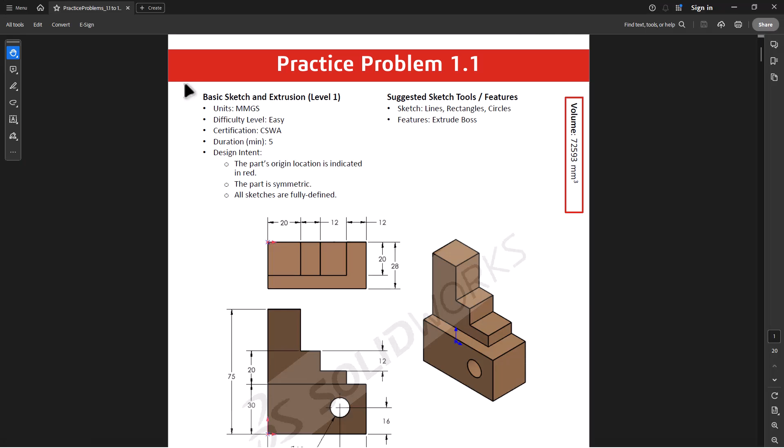Now let's begin with level 1. Here I have a PDF file. When you open it, you'll find the description regarding the problem. I want you to go through the sketch given in the part and try to match your volume against the given value on the right top corner. So let's start with problem 1.1.

Now click on new document. I will use this millimeter template. Here I have added a sensor which measures the volume. You can also measure the volume from the Evaluate tab and click on mass property after you create the model. So let's start the modeling process.

Now I will open the sketch on the front side. Here I will add the bottom rectangle of 30 by 60. Along with that, I will also add the circle whose diameter is 12, and I will fix its location as given in the sketch. Now I can also draw the upper part, and I will use this sketch in the second extrusion.

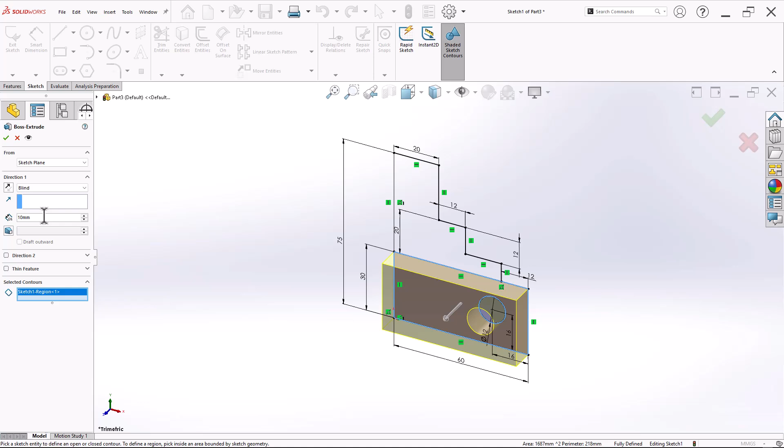Now press the shortcut key and click on extrude. I will choose this region and extrude by 28 mm. Now I will expand and select the sketch, and again extrude the upper part by 20 mm. Now let's rebuild this. You will see the volume over here - it is 72593. So here in the PDF, it is the same answer, 72593.

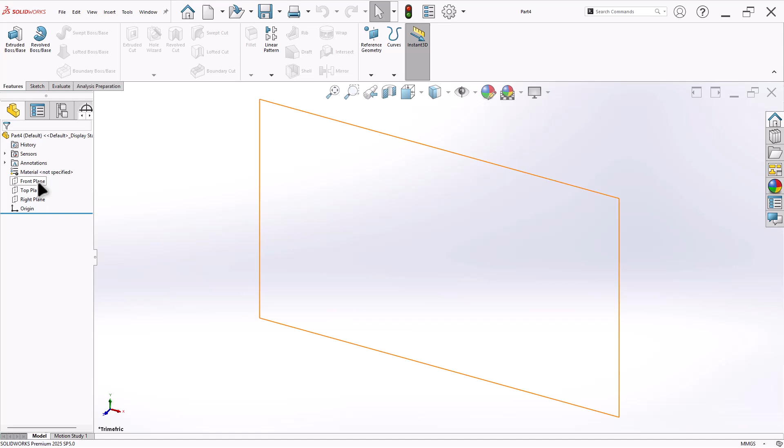Now let's solve problem 1.2. Look at the sketch very carefully. We'll draw this part and extrude, then we'll draw this sketch and extrude, and then we'll add these two circles at the top. So let's start a new drawing. On the right, I will open the sketch.

And I will also add dimensions. This is 8. This is 36. Now these two should be aligned. Now the distance between them is 5 as given. Now the angle is 65. Now from top, this is 15.

Now let's add the height. From here to here it is 58. Now let's add the remaining sketch part. So from here, let's add, this is of 24, this is of 16. From here to here it is given 16. This part is of 18. And this fully defines the sketch.

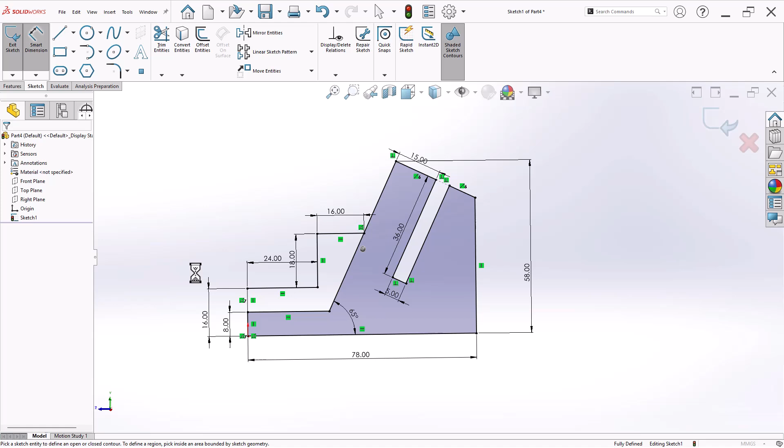So shortcut key S. Now extrude this part by 28. Similarly, let's expand the sketch and click on extrude, and select this - this time it is of 18. Sorry. Let's save the part.

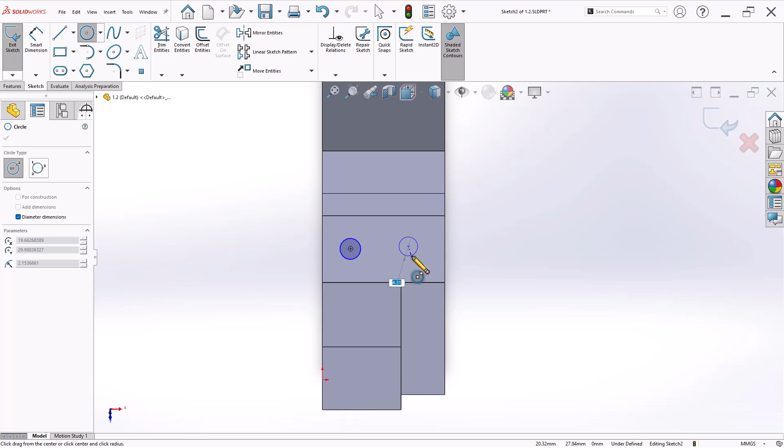On top, open the sketch and draw two circles of equal diameter, and their diameter is 6. Now let's add a center line, put it over here. Now let's give the side distance of 7. And from here it is also 7.

Now press S, the shortcut key, and extrude by 6 mm. So the answer is 739, which is given in the PDF. So here is the answer, 739.

Now let's solve practice problem 1.3. Open new document, choose millimeter template. I'll go on top and draw one circle, second circle.

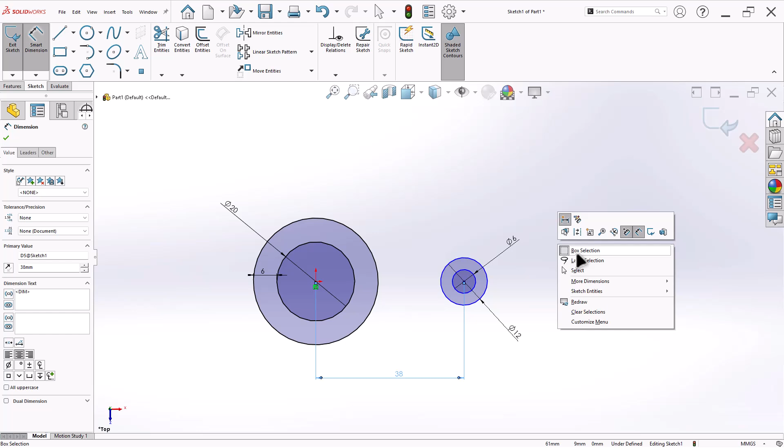Let's join a tangent line, and make this point and the center of the second point horizontal.

Now let's press the S key and extrude. This time I will extrude this part by 14. I will expand the sketch and extrude again - this time I will extrude this region by 6. Again I will use the same sketch and extrude.

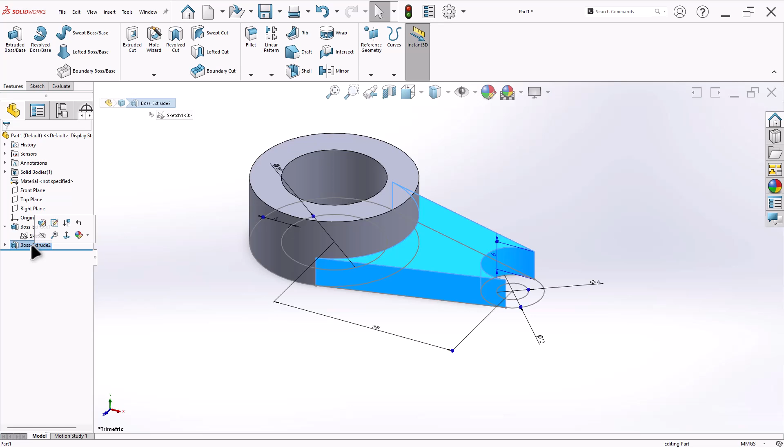This time I will extrude by... let's edit this and also add these regions and this circle. Now let's go for again and extrude - this time I will choose this and reverse the direction and add the distance by 24. Now the answer is not matching, so there is a mistake over here. This radius is 9, so it is going to be 18.

So let's exit, save this. Now it is 16267, let's check the PDF. Again it is 16267, so it's a complete match.

Now let's try practice problem 1.4. The dimensions are given in inches and the answer of volume is 0.146 cubic inches. Now start a new document - this time I will choose this template.

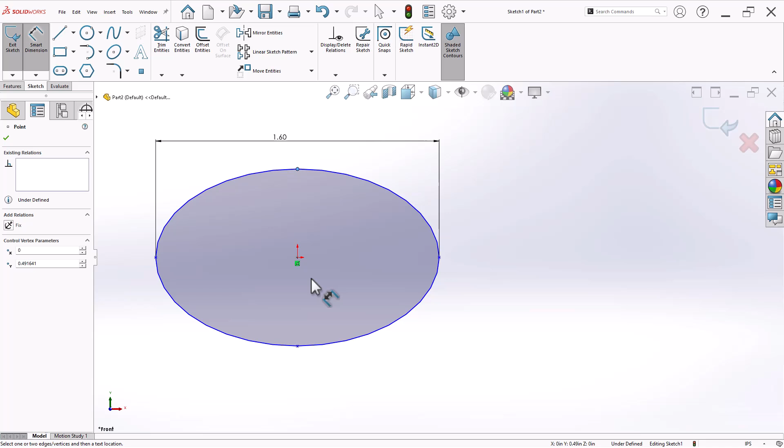So on the front I will open the sketch. I will choose ellipse. Overall dimensions from here to here it is 1.6, and from here to here it is 0.5. Select this point and this point and make it horizontal.

Again let's add the circle over here. Now their diameters are equal. Select them and make equal and give the diameters. Diameter is 0.125. Now let's increase the precision level so it reads properly to 0.125.

Now their distance from end is given, which is 0.175. Let's make its precision level to 3. Similarly, from here to here it is 0.175. Let's make them horizontal.

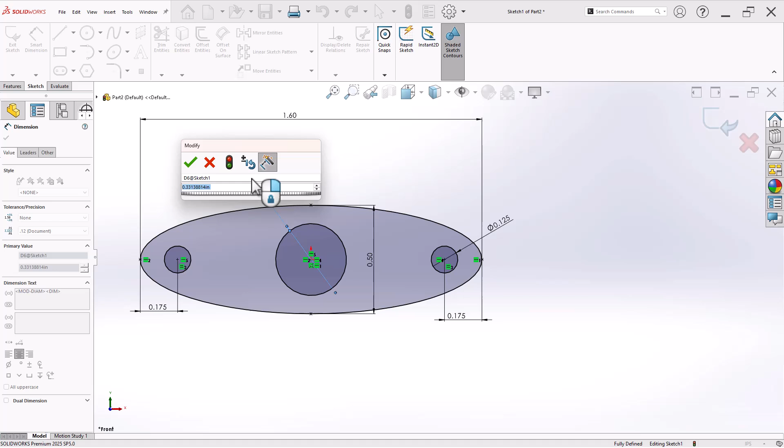Let's add circle in the center whose diameter is 0.45. Now let's add the hexagon, or we'll add later. Now let's use shortcut key S and extrude.

Now for the regions I will choose these two so that the ellipse gets extruded with these small two holes. Now the extrusion depth as given in problem is 0.15.

Now let's expand and reuse the same sketch again. This time I will choose this circle and I will extrude by offsetting it. So from surface I will start as given in the manual. So this will be 0.45.

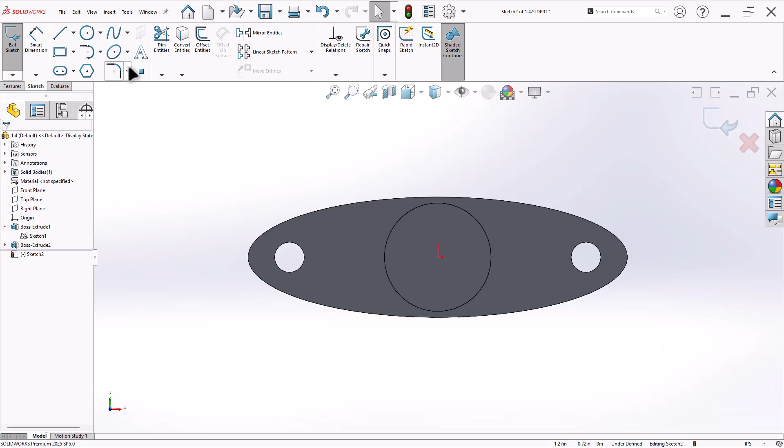Let's draw over here the hexagon. Make this horizontal. The distance from side to side is 0.25. So shortcut key extrude cut.

Now from here I have to choose offset from surface. So this is the surface and I have to add 0.15. Please save and rebuild it. Now it is reading 0.15.

Let's go over here, evaluate and mass property. Let's go to options and choose the precision value to 3. Now it comes out 0.146 cubic inch. So this is perfectly matched with the PDF answer.

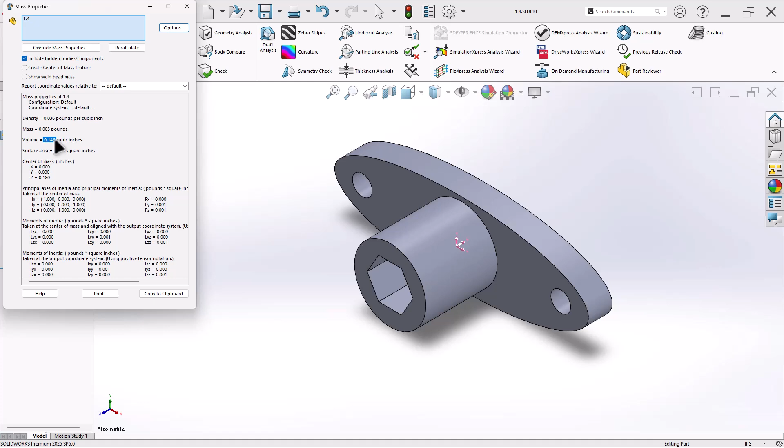Let's solve problem 1.5. Here the dimensions are given in inch and the answer is 0.5492 inch cube. Start new document. Select the inch template, or you can start with the default template and change the units from millimeter to IPS.

I will draw, so this is 0.8. Similarly, this is also 0.8.

Now let's draw center line and a rectangle. Let's make the horizontal sides symmetric. Let's give dimensions to this horizontal side of rectangle to 3.25. Now let's give the width is 0.4.

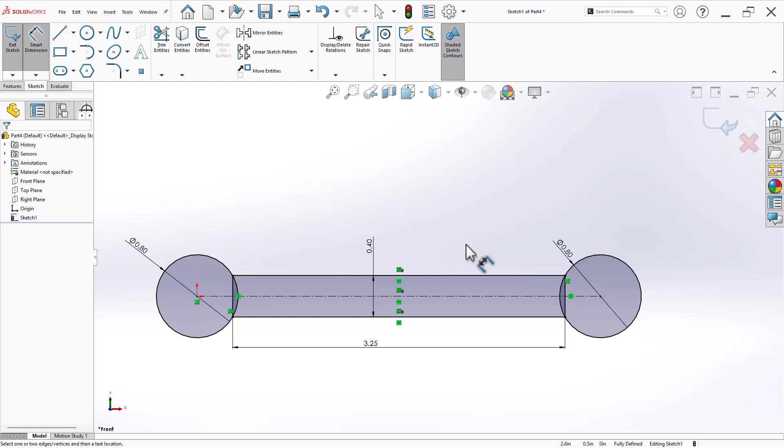Now let's draw a hexagon over here. Make this horizontal. This dimension is 0.5.

And I will choose trim, and I will use this option, keep trim entities as construction geometry. So I will remove this part. So from here to here, it is converted into construction geometry. Similarly, I will remove this part and this part.

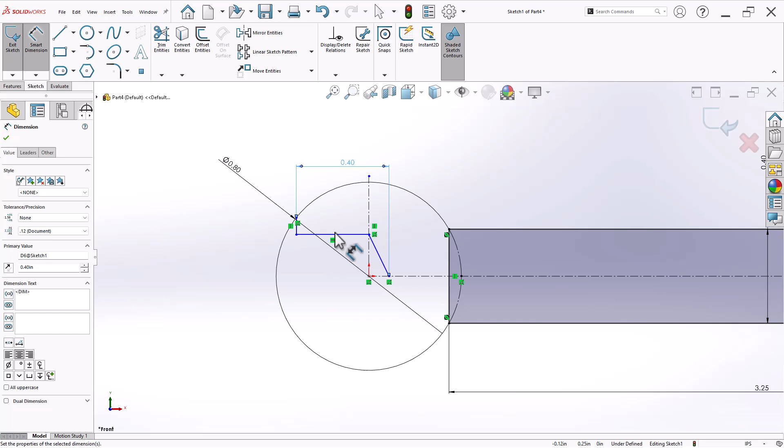Now let's try to draw the lines from here like this. Let's draw vertical center line. From here to here it is 0.4. This line is 0.25. From here to here, dimension is 0.5.

Now let's mirror these entities and trim this part. Now let's try to extrude. S for shortcut key. I will choose this part and this part. The thickness is 0.3.

Rebuild this. Let's say the volume is 0.55, which is as given in the exercise. So the volume is correct. Again, you can go to mass property and try to change the precision level to 3 digits, which is 0.55. So it is perfectly matching.

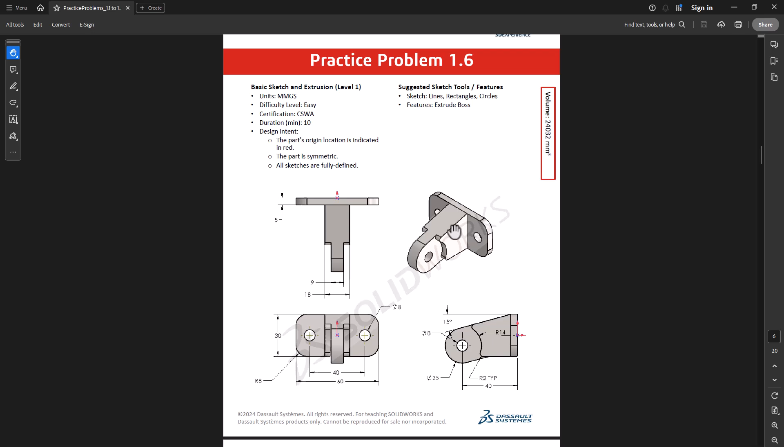Now let's try to solve problem 1.6. Here dimensions are given in millimeter. So this is isometric view, front, top and side view.

Let's start with the millimeter. I will use center rectangle. We'll add the radius 8 and also add 2 circles.

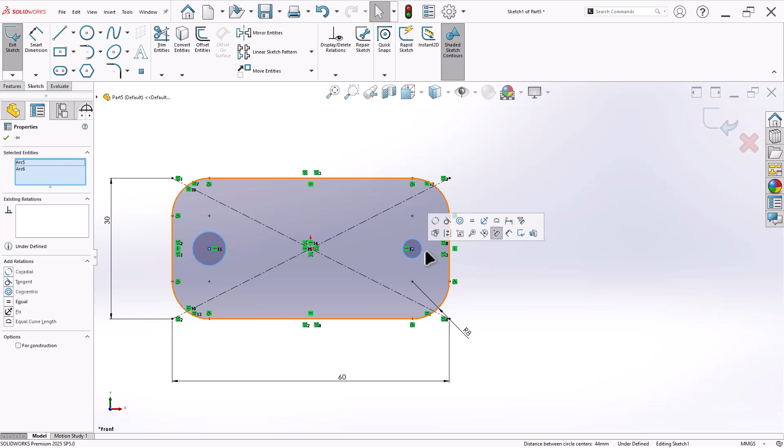Make their centers perfectly aligned. Choose them and make their diameter equal. Add the diameter as given, 8. Now add the dimension between them as given, 40.

They should be equally distributed from the center. So add center line. Now select this and the center and make them symmetric. Go to extrude and add the thickness 5.

Now let's add center part by drawing the sketch on a right plane. So here I will draw like this. Now I'll make this kind of a structure.

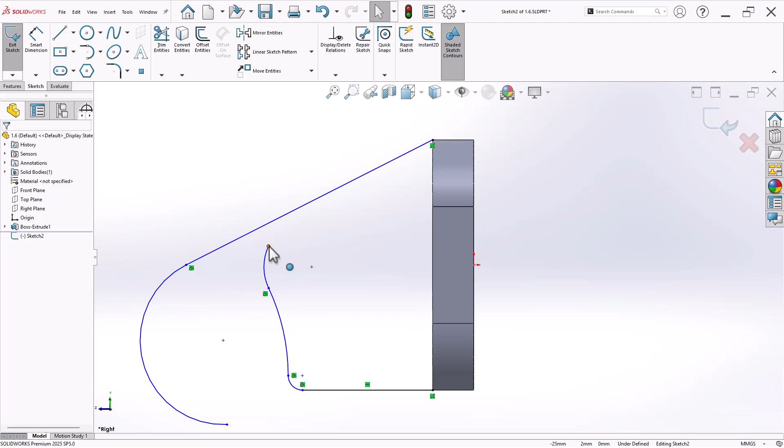This and this will be equal. Value will be 2. This is 14.

So from here to here it is 15. This radius is 12.5 because diameter is 25.

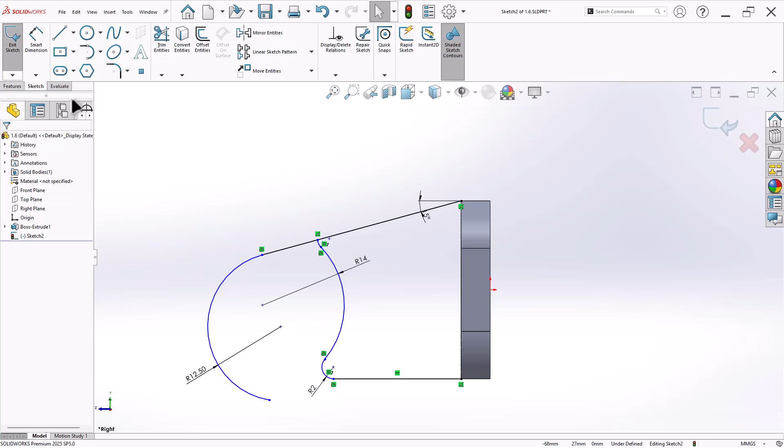From here I will draw a line. Choose this and make them tangent. Now from here, from back side it is 40.

Now let's add the circle of 8 diameter. Now let's drag the sketch.

It is underdefined, so as given in PDF, this center and this center is coincident. This line is still underdefined. Now we assume that because of inclination of 15 degree, the inclination from center to this point is 15, and also from this point to this is 15.

So I will draw a center line from here to here, and a vertical center line, this one, and I will provide angle between them as 15.

Again I need to add the line over here to close the area. Now let's go and extrude.

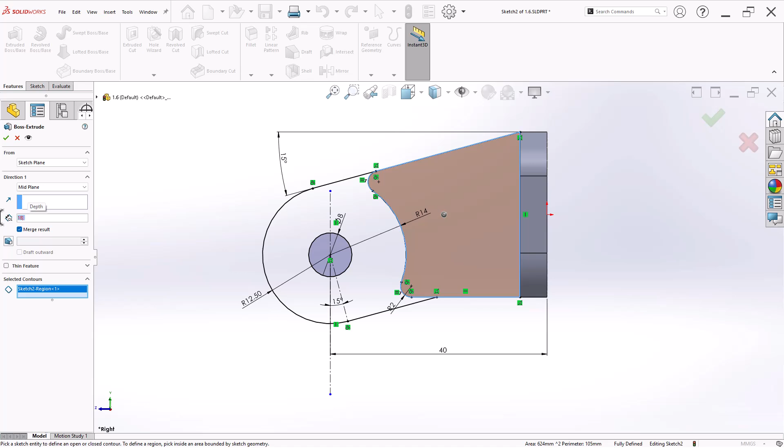So this is the first one, mid plane, and it is 18. 18. Okay.

Now let's expand that part again and extrude, and this time I will choose this region and I will extrude by 9.

So Control B, and it is 24032, and the answer is again 24032 given in the PDF file. So it is correct.

Now let's try to solve problem 1.7. Here, to solve this exercise, we'll begin from the front, draw this shape and extrude this L shape. And from the bottom, we'll try to create this geometry. This way we are going to complete this exercise.

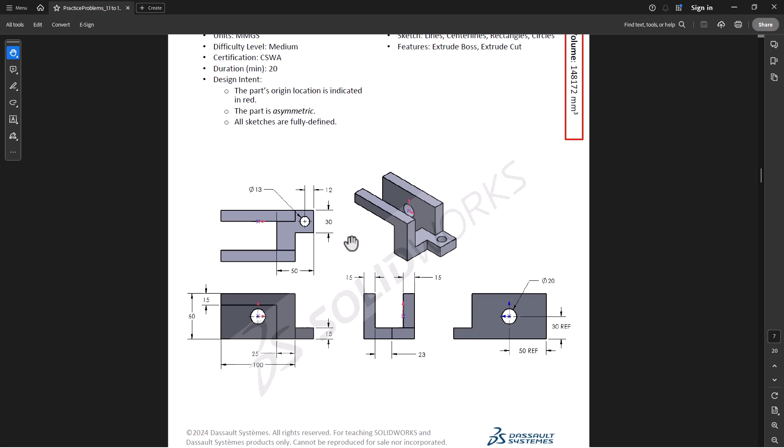So open new document. Let's begin sketching in front. This is 60. This is 100.

Similarly, from here to here. Let's give the dimensions. Now let's extrude. So the extrusion depth given is 15.

Now let's go and start creating the sketch on this side. Because orientation is wrong, let's flip it so it will match with the top view given in the PDF file. So let's begin.

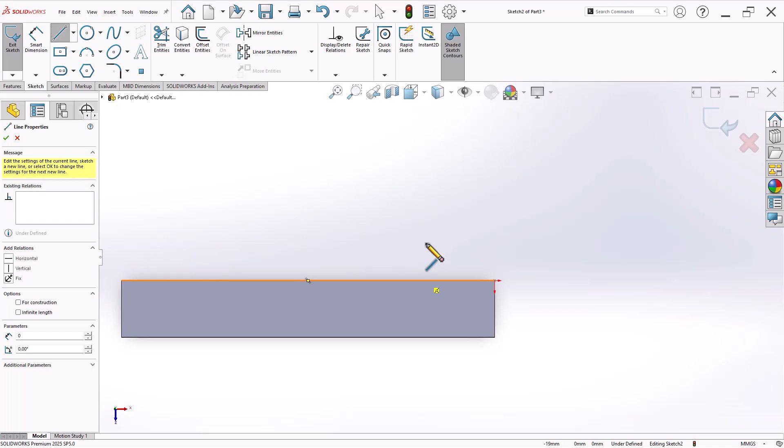Again, let's align this edge with this. Let's also complete this part of the sketch. Let's align with this.

This is 15. This is 50. This is 30. And this is given as on a side view it is 23.

Now let's align with this line, coincident. So this edge is aligned as given in the top view.

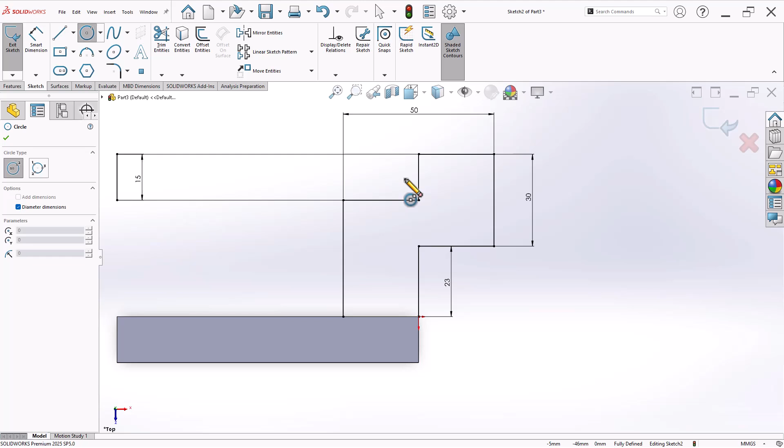Let's draw a circle whose diameter is 13, and from here it is 12. Now let's align the center.

Let's go to extrude. I will choose this region and flip the direction, and depth is as given, 15.

Again expand the same sketch and extrude it. This time I will choose this and reverse the direction, and I will choose the end reference up to surface, and I will choose this and click OK. Now let's create the hole over here.

So select this side and click OK. So draw the circle whose diameter is 20. Now dimensions are given. So this is 30.

So this is 30. Now let's add the horizontal dimensions, which is 50 as given in the sketch. So let's extrude cut.

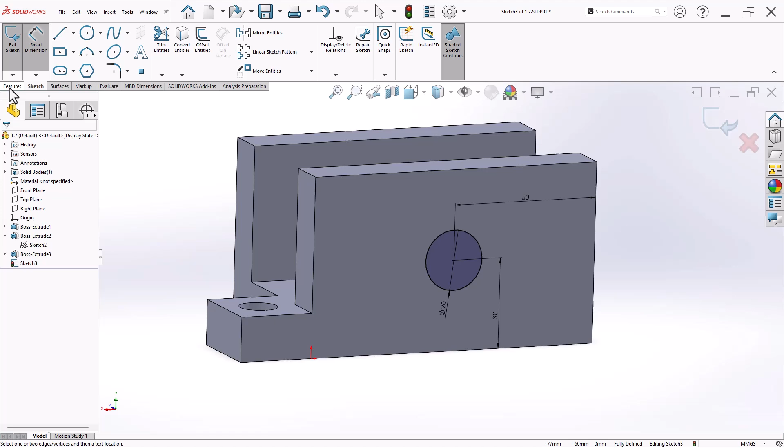We can go through all because it is not touching any surface. Now let's measure the volume. I have added the

sensor over here. Let's rebuild it. So the final answer is 148171, and in the PDF it is given as 148117. So it is within the 1% error.

Now let's try practice problem 1.8. Here, the overall dimension is 200, 125 and 175. Along with that, we need to consider the text given over here, right angle. So let's try to build this exercise.

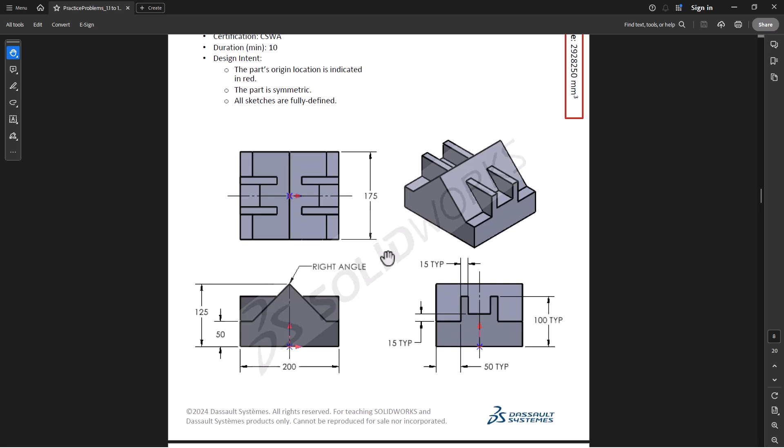So start new document. On the front, I will draw the midpoint line. I will give the dimensions 200 as given. This is 50. Now let's draw

a center line. So here again it is 50. Draw like this.

Here these two lines are at 90 degree. They must be symmetric about. Now let's add

overall height 125. So here it is given it is right angle. So you need to make these two lines having 90 degree in between them and make them symmetric about this vertical center line. Otherwise you're not going to get the length of this line. Orally, you are not able to fully define the sketch.

So let's extrude. The extrude depth is total 175.

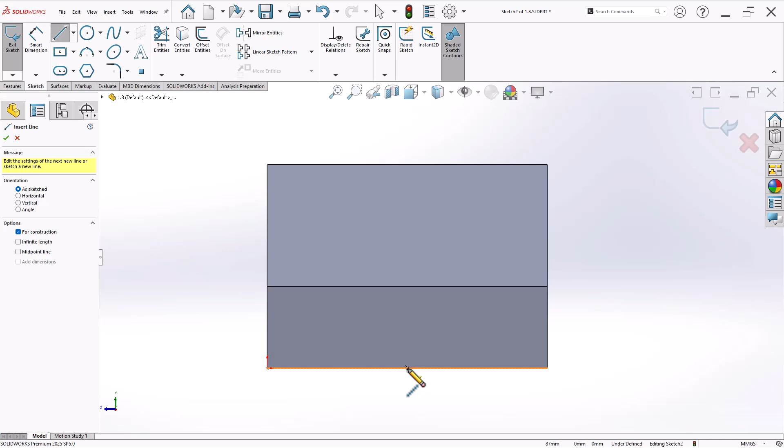Now from here let's draw the remaining part. So let's draw a center line. So from here let's also draw a horizontal line.

Now let's add the dimensions. So this is 15. This is also 15. And from here to here, this is 50. Overall, the height is given 100.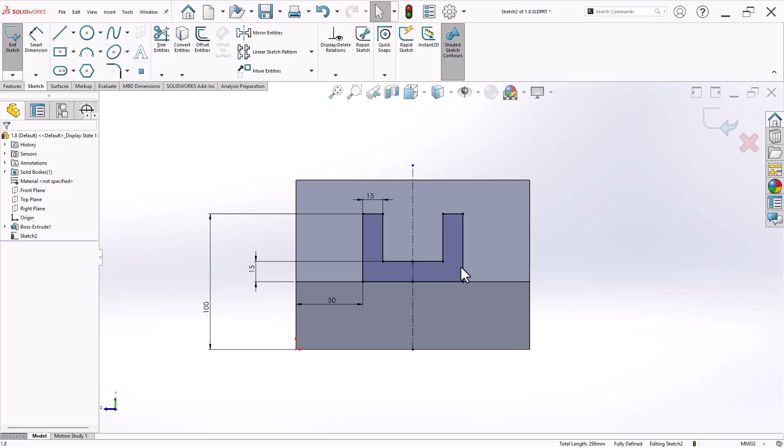Let's mirror. Now let's extrude. Let's reverse, and this time up to surface we'll choose this.

Now the volume given in the PDF file is 298,28250. So it is exactly matching. So our answer is correct.

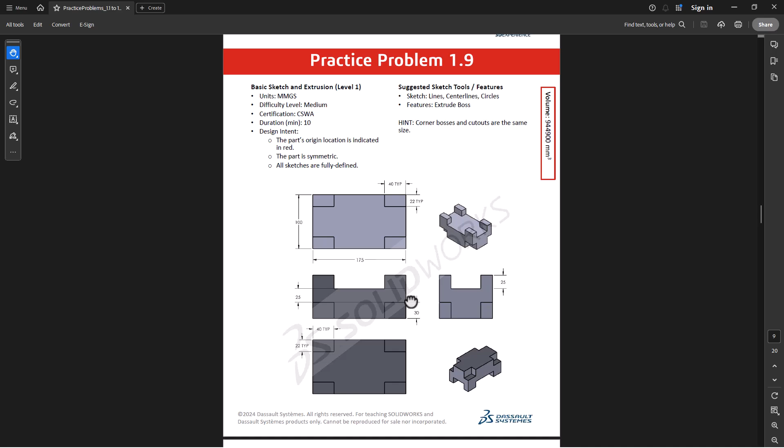Now let's try practice problem 1.9. We'll begin by drawing this rectangle, then add the four corners, then join this segment. We'll first try to extrude this middle part, then this four corner extrusions block, and the bottom part without these four corners. So let's try in SolidWorks. Start the part file with the appropriate settings.

Now let's go to top. Here I will choose the center point rectangle, 100 by 175. Now I will also add a rectangle whose dimension is 22 by 40.

Now I will add a few center lines, horizontal and vertical. Now I will mirror this rectangle. I will repeat the mirror part. Now I will also add some lines over here.

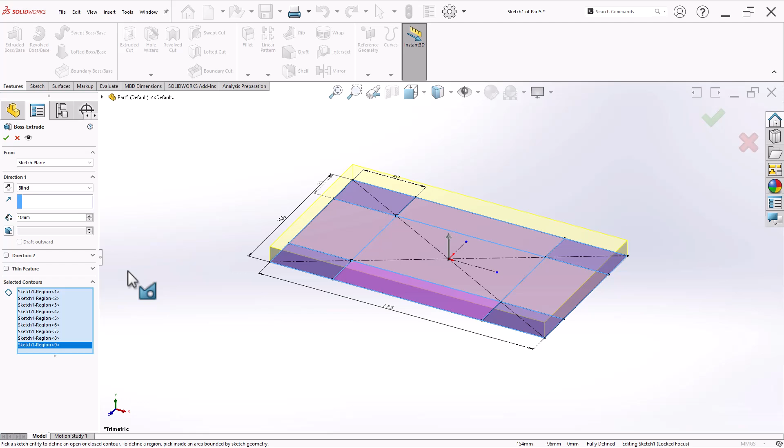Now let's extrude all the regions by 10. If you're not comfortable with the region concept, just go build part by part.

Now let's expand the sketch and again extrude, this time this region, this region, this region, and this region. But here the overall height is given as 25, so that is the top surface. We need to shift from the surface concept over here and add the 25 mm as given in the side view. So this is our starting surface.

From here it is 25 given, but our sketch lies on the bottom. That's why we have to use in both extrude these options. We have to change the from conditions.

Now let's again select the same sketch and extrude. This time I will choose this region, this region, this region, this region, and along with this region, but I will change the directions. Again, it is 30.

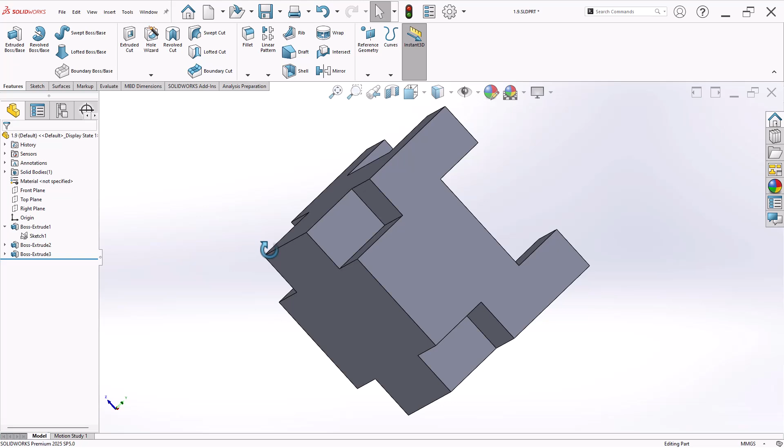So this way you are able to create the object. If you are not comfortable, go one by one, create the sketch separately and add the extrusions.

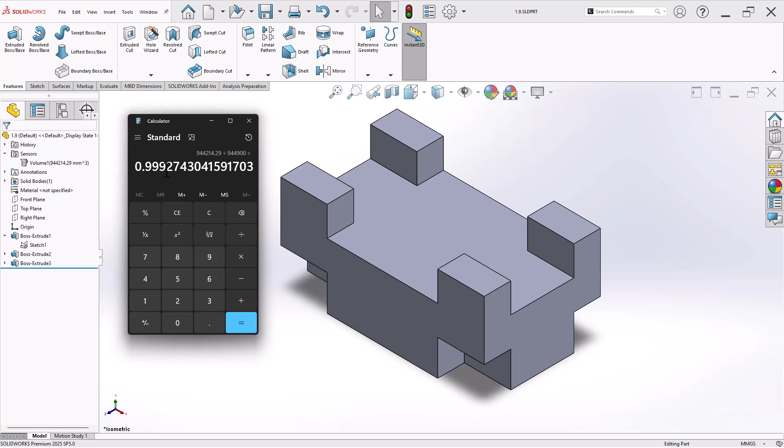Now let's verify the volume. Here the volume is 9442, but in the exam PDF file it is given as 944900. Let's verify the difference. So here the answer is 944214.29. Now let's divide by the answer given in the PDF: 944900. So it is within the 1%. In CSWA exam, you may come across this problem; your answer may not be exactly matching, but you have to go with the nearest answer. In the exam, variation by 1% is always allowed. So it is within 1%, so our answer is correct.

Now let's try practice problem 1.10. A special note is given over here, so go through that note. In top view, we are going to create this shape and extrude by the 10 millimeter thickness as given. From the front side, we'll add these two round ends. So let's start.

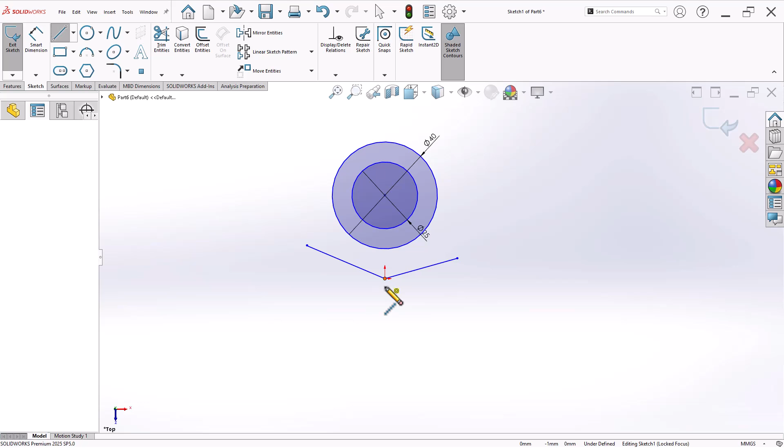Now on the top, let's open the sketch. From here, diameter is 25. Outside diameter is 40, but it is given in terms of radius, which is 20. Now let's draw such lines, making sure they are symmetric.

Now let's add a tangent line. Now let's trim this part. Now let's finalize the dimensions.

So here this angle is given as 35. From here it is 45, and in between this it is given as 19. Here the value is not mentioned, but from the figure you can understand that the relation between these two lines is 90 degrees.

Now, when I move the sketch, I need to lock the center perfectly aligned with the origin. Now let's extrude by 10.

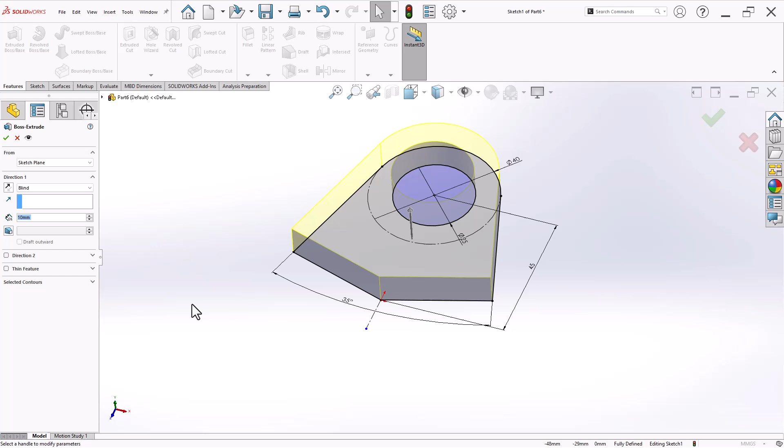Now here I will open a new sketch. Also add the circle, which has a radius of 18. And the height from here to here is 32. Now yet we need to give some typical dimensions, so from here to here it is 20.

So now let's extrude, reverse the direction, and thickness is 10. Now choose this right plane and let's mirror the feature. Select from the tree and click OK.

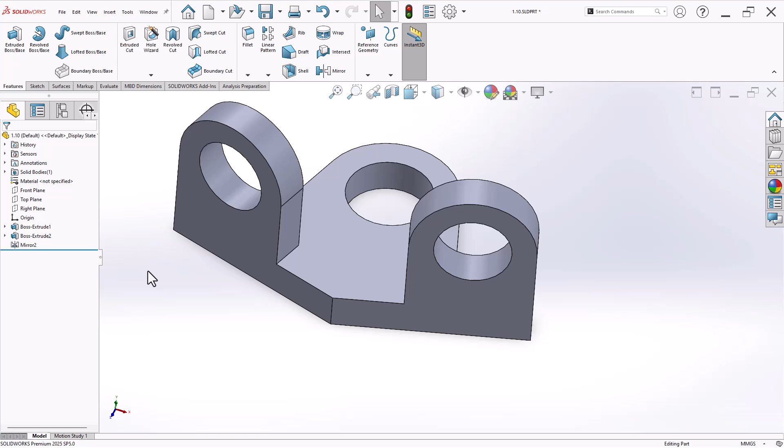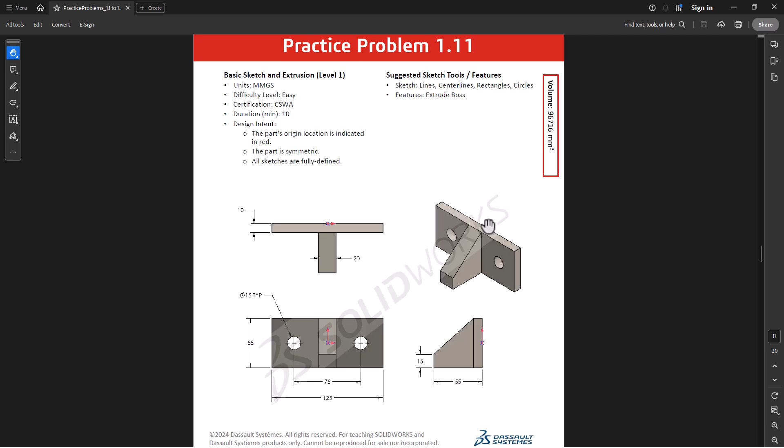Now let's solve problem 1.11, which is very simple. We'll start from this base rectangle, place the holes, extrude it, then place in the middle this shape and extrude by 20.

Start new document. So on the front, let's sketch the center rectangle, because in the practice problem it is given that origin is center: 55, 125. Now let's add the circle, diameter is 15. Make sure it is aligned with the origin.

Now let's mirror. Now let's give the dimension between them, which is 75. Press the shortcut key and create the extrusions, the distance is 10. Now on the right plane, I will create a sketch.

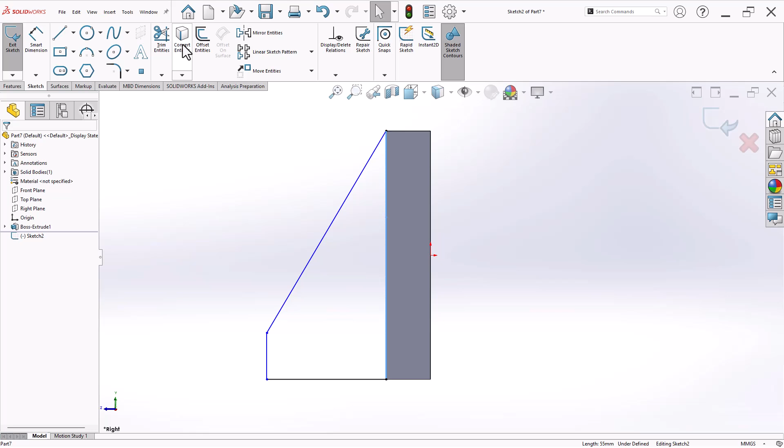I will convert this edge and provide the dimensions. This is 15. From here, from the back edge, the distance is 55.

Shortcut key, extrude. This time I will use right click and mid plane. The depth is 20. Let's save the part.

You can go over here and find the volume, or you can find it from the sensor which I have created. So the answer is 96715, and it is given in the PDF file as 96716. So it is perfectly fine.

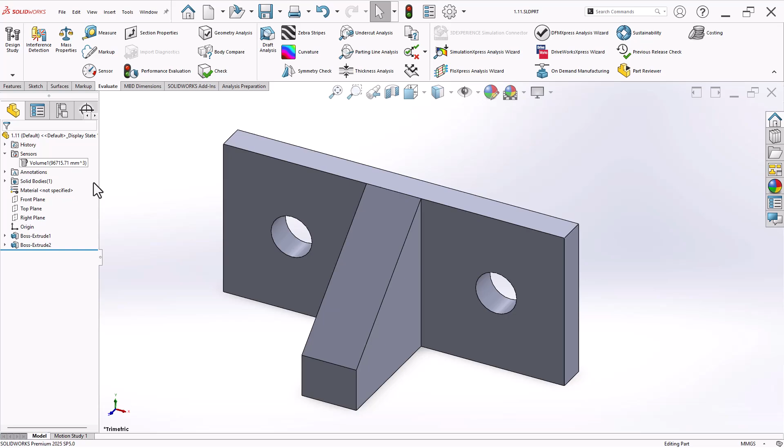Now let's try to solve practice problem 1.12. It is a very simple bracket type of problem. We'll begin from the right plane with this shape and extrude it. Then we'll add this triangular shape and cut the hole. Start document on a millimeter template.

Please check your units. On a right plane, you can just draw an L shape. This is 10. This is also 10, given in top view. And in front view, this is 55. From top view, this is 75.

Now let's extrude. The total depth is 125. Now let's add the triangular part over here.

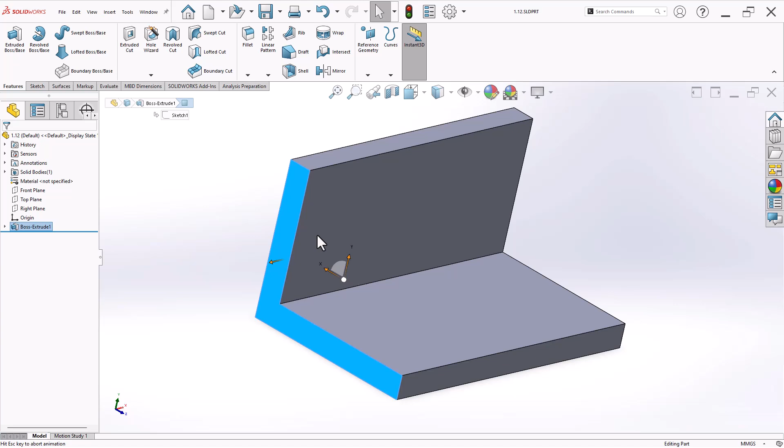You can use either the rib feature or extrude features, it's up to you. But if you use extrude, then you have to create regions. So let's try, instead of extrude, let's try the rib feature.

So for that I need to create a sketch, from here to here. Now let's go to features and create a rib. I need to understand the depth, which is 10. Perfectly fine. Let's click OK.

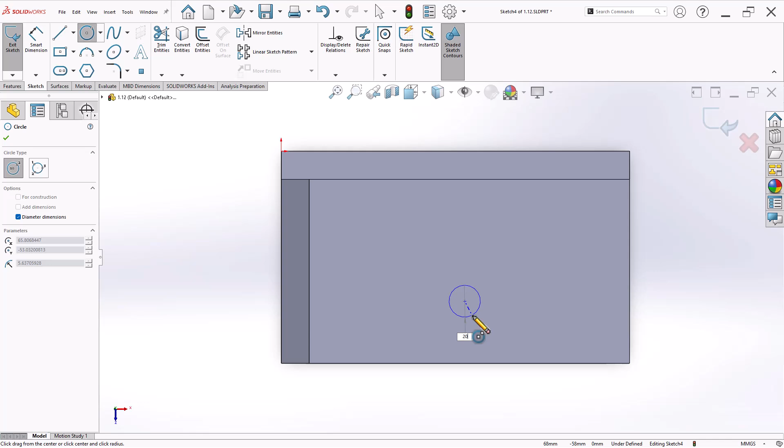Now let's add the circular hole. Its diameter is 20. For reference, it is given as 62.5, and from bottom it is given as 25. So let's create a cut. Now let's see the volume.

It is 177,233. So it is completely matched with the given answer.

Now in practice problem 1.13, we'll have to use a single extrude feature to create this object. But before that, we need to draw this sketch. Please mind well what sketch dimensions are given.

Let's say here these two lines are parallel. Again, on the left side, the value is given in terms of angular deviation, which is 4 degrees. The top side radius is 3. It is drawn on a circular part having a diameter of 40. And the larger diameter, used as a reference, is 125. So let's try to solve this problem and match the answer.

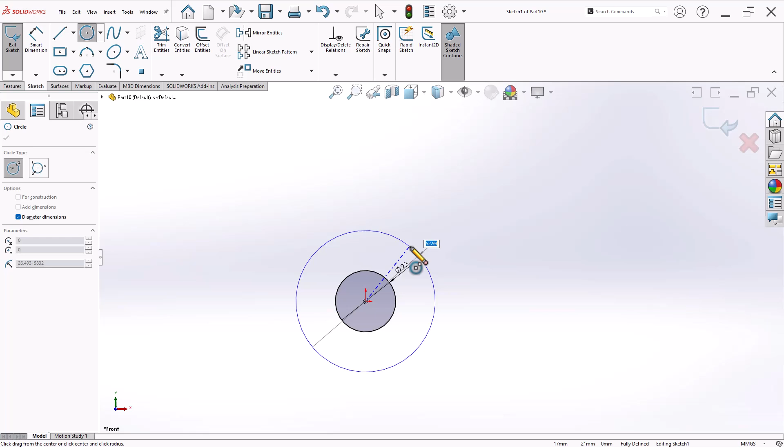So start with the document. Because it requires only a single extrude feature, we'll solve it in the front plane. So this diameter is 23. Another diameter is 40. Here this diameter is 6. In the file it is given as a radius. Now let's draw the largest circle, which is 125, and turn it into a construction circle.

Now let's add the center lines, one more from here to here. So the angle between them is given as 16.

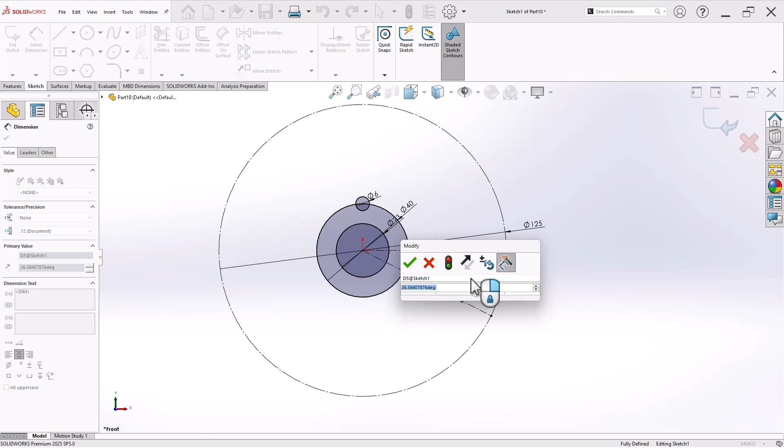Now let's place the circle over here. Radius is 5, so diameter is 10. Now let's draw a line.

It should be parallel to the center line. Now let's extend and attach it over here. Similarly, let's draw one more line and let's extend like this.

Now let's add the angle, 4 degrees. Now let's trim away the additional part.

Now let's add the radiuses, that is between the smaller circle and this line. Now let's make them tangent to the respective entities.

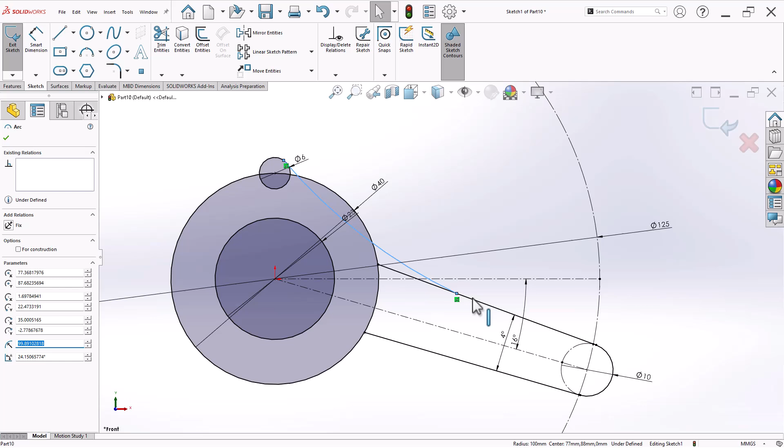Now its diameter is 75. Now let's trim the unwanted part.

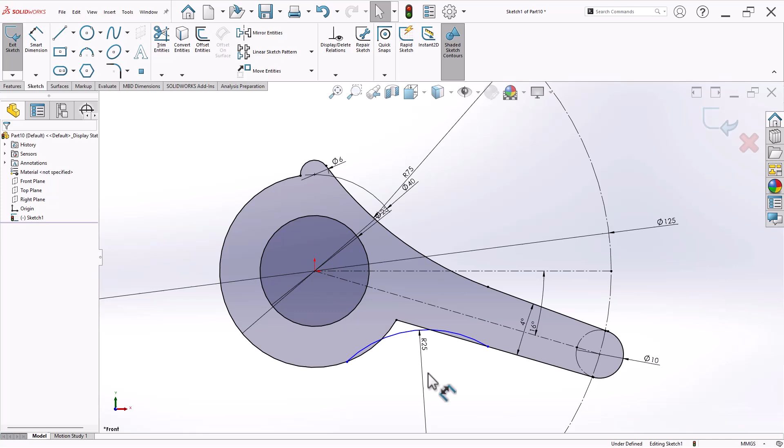Now let's add the radiuses. It is of 25 value, but should be tangent to the circle. Now let's trim this part.

Let's add a center line to mirror the created geometry. So select this one, circle, this line, this one, and click on mirror. Select this part. Sorry, let's select this, and this time right click.

Again, let's trim the additional thing.

Okay, now let's try to extrude this part. So press S and extrude. Thickness is 5.

Let's try to see the volume. The volume is 9533.84, and in the PDF file the solution answer is 9534. So it is perfectly matching, which is within the 1% error.

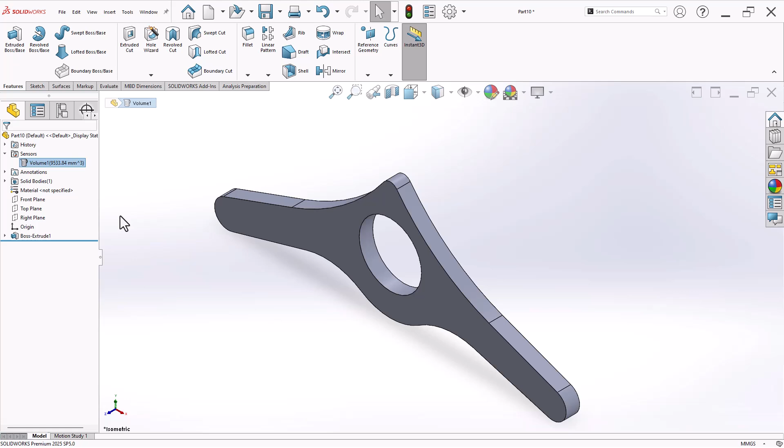Now let's do practice problem 1.14. Just go through the front, side and top views for the sketch dimensions. Select the appropriate template. So on a top plane,

I will use the rectangle tool, especially the middle rectangle tool. And I will use the radius tool, 20, and select the rectangle. Now let's add the circle.

This and this, 4 circles are equal. Now let's give the dimensions, 20. Shortcut key and extrude. Thickness is 10. Right click. Okay, now let's draw on a right plane.

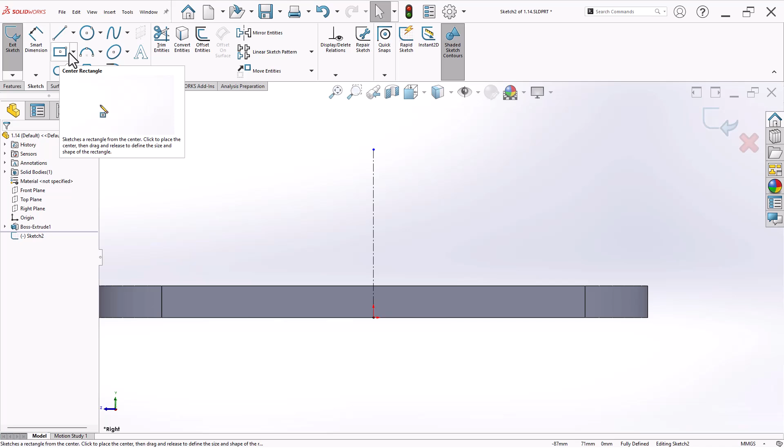The remaining part. So here, let's draw the center line. I will use the rectangle tool, and the height is given from the bottom, so we cannot use the direct sketch dimensions.

So this is 75, this is 120, and let's make them symmetric. Select this line, press Ctrl, center line, this line, and make them symmetric. Let's add a radius of 10 to these two corners.

Let's add a circle over here whose diameter is 25. Now let's locate its center from the bottom by 55. Again, the reference dimension given is 60. Now let's extrude; this time it will be mid plane, so thickness is 10. Now let's try to see the volume.

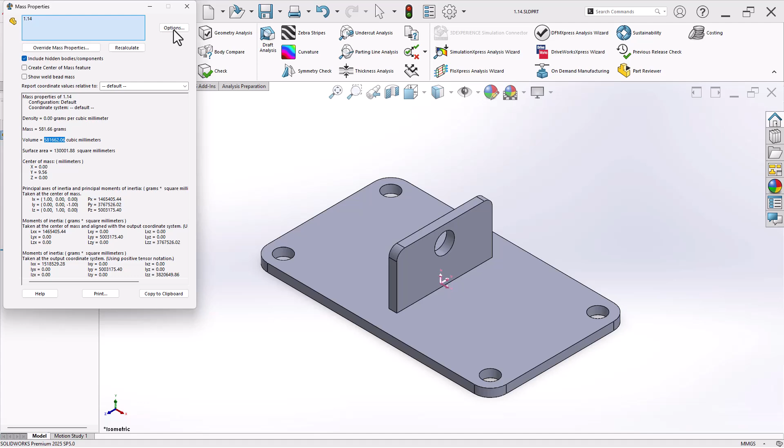Here it is 581662, which perfectly matches the given answer. You can go over to the Evaluate tab and find the same over here, but to avoid that extra step, I have added a sensor.

Now let's try problem 1.15. So we'll begin in front plane with this shape, then add this bottom part, and lastly we are going to add this bracket. So start a new document. On front plane, let's open the sketch.

Let's start drawing the line. This is 40 as given. Now let's add the dimensions. From here to here it is 35. This is 10.

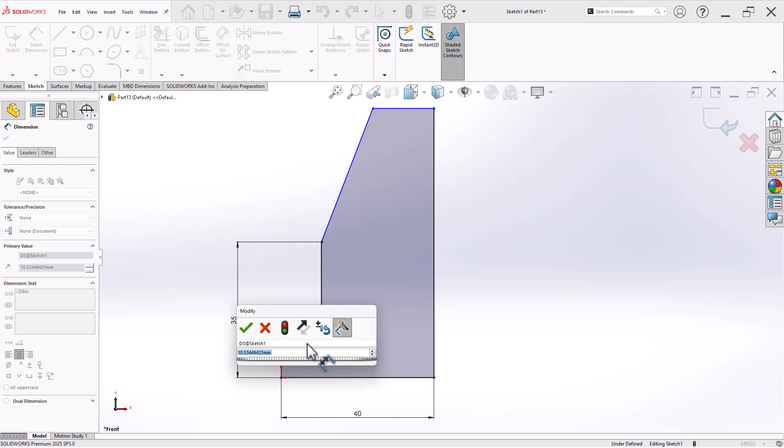Now let's apply the angle tool. So this is 30, and overall height is 65 as given in sketch. Now here we still have to fix the height of this line. If you look at the sketch carefully, it is aligned with the bottom part.

So let's sketch from here, like this, and add the center point radius. Let's remove this part. Let's make them tangent.

So from here it is 15, radius is 7. Now let's align this with this, and align as given in the sketch. This line is aligned with this vertical edge.

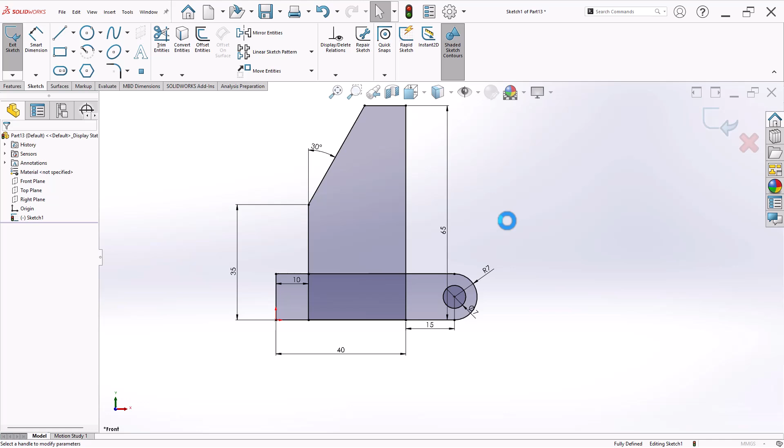Let's add a circle which is of 7 diameter. Shortcut key and extrude. This time I will choose this region, these two regions, and it is 20. Again, expand this case and extrude.

This time I will choose this region. I will flip the direction and add the thickness 5. So match your construction with the sketch provided in the PDF file.

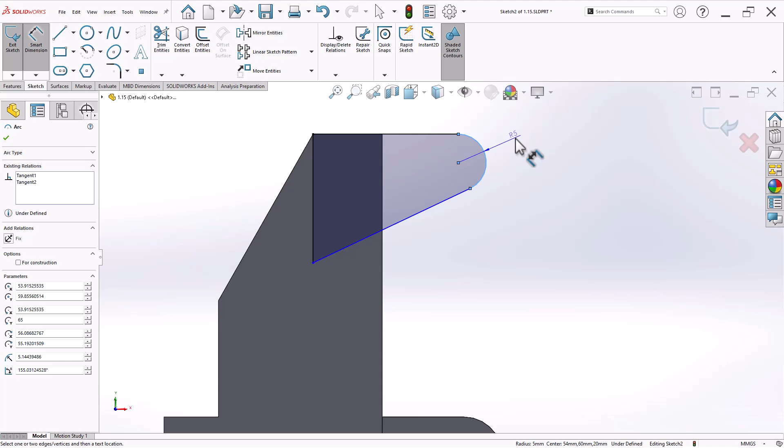Now let's open the sketch one over here. So let's start here. Make sure the arc is tangent with the geometry. This is given as 5. Let's add a circle whose diameter is 6.

Let's add dimension from here to here. It is given as 45. And the angle between these two is 65. Let's extrude by 5 mm.

Now let's measure the volume. It is 45867. Here it is 45866.92. So it is completely right.

Let's try 1.16. Now instead of creating this sketch and extruding 2 times with the same sketch, I will attempt first the bottom plate, then draw this upper part and extrude it. You can cover it in a single sketch and reuse the same sketch, but ultimately you will have to have 2 extrude features in this case. So create a new document.

Let's create the rectangle in front. So this is 15, 125. Press extrude, reverse the directions, and the width is 60.

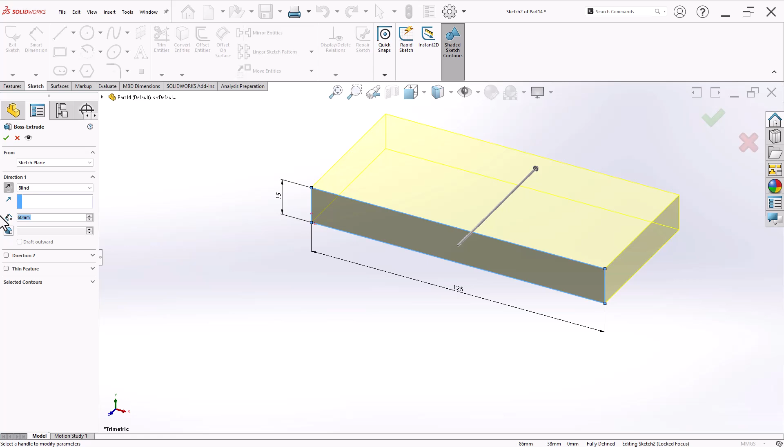Now let's open the sketch over here. Again, let's add the circle. Radius is 20. Now the center is located from here at 50. And overall height is 35. Now the sketch is fully defined.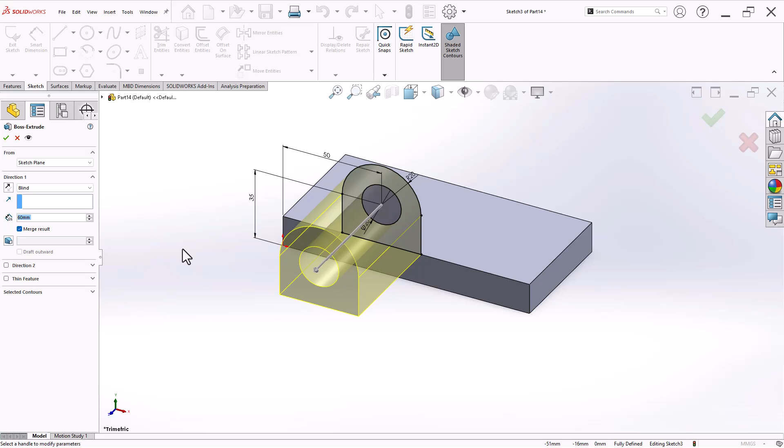Let's go for extrusion. Reverse the direction, and this time the depth is 40. Now let's measure the volume. Here it is 157066. It perfectly matches the provided solution. You can also go over to Evaluate and find the mass property, but to save time I have added this sensor over here.

Now let's try 1.17. It's a simple single extrusion feature object. We'll draw the sketch in front, starting from the bottom side. The radius is 12, meaning diameter is 24. Again, it is 11. Now let's draw the line.

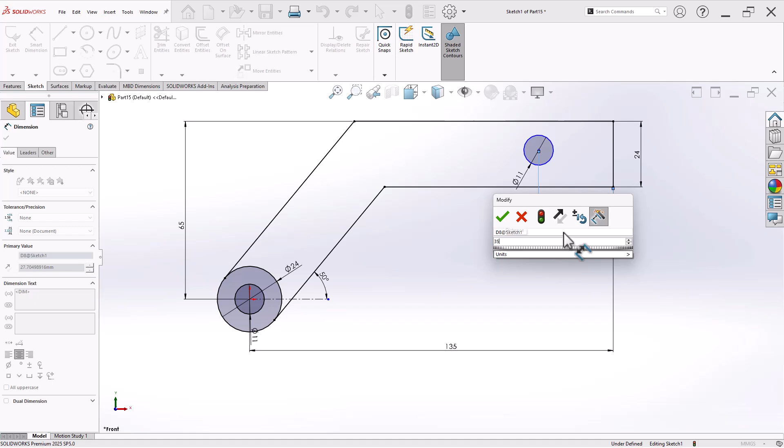Now let's add the circle whose diameter is the same, which is 11. Now let's locate its center: from the right side 35, and from here it is given 12. If you wish, you can remove this part. Let's try to remove that part.

Now let's extrude. It is 10. Let's expand the sensor, so the volume is 38692.72, and the given answer is 38692.93, so it is 93. It is perfectly fine.

Now let's try 1.18. We'll begin creating the 3D part from the top, and then from the side view we'll add these two components. See, open the part. Let's model. Let's go to the top view.

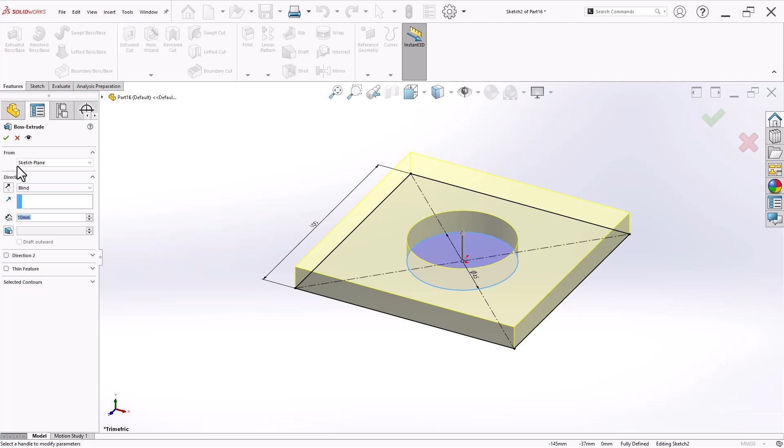Dimension is 100. Let's place this circle having diameter 45 and extrude. On the upside it is given as 10, because the top surface aligned with the right side part.

Now let's try to create a sketch in front. So from here, let's draw the line. Let's extend, whose dimension is 155, up to like this.

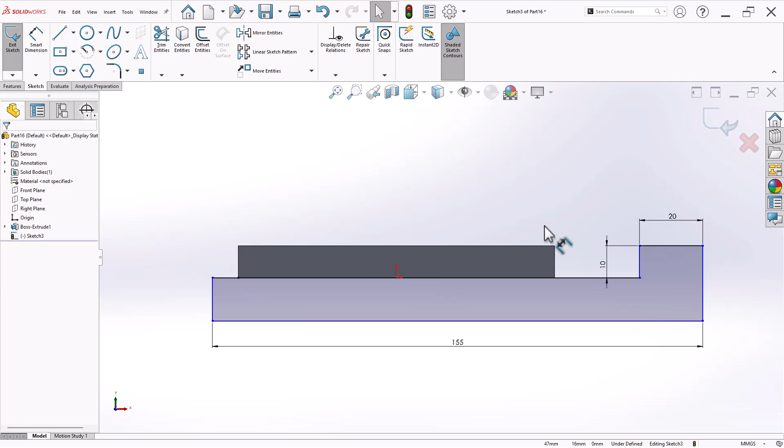And make this horizontal. So this is 10. This is given as 20. So from here it is given as 8. Now let's add dimensions: from here to here it is 20. So let's extrude.

Now it is from the sketch plane, it should be offset by 8 mm as given in the exercise file. So let's offset by 8 millimeter and then reverse the extrusion direction, and the depth is 32.

Now use this front plane to mirror that feature. So go to sensor and find the volume. So it is 295295, so it is 295296. It is perfectly matching with the given answer.

Now let's try exercise 1.19. It's very simple. We begin from the top view. We'll extrude with these two holes. We'll add this part and then we'll add this part.

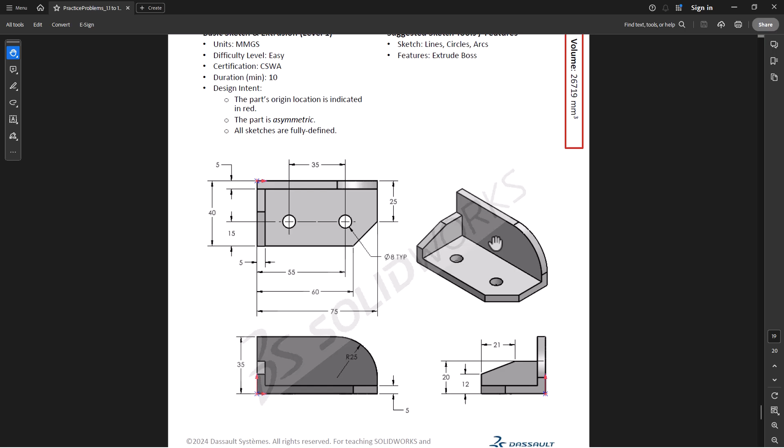So start modeling with the millimeter template. Let's use overall dimensions 40 and 75. Now let's add like this. So this is 60. And from here it is 25.

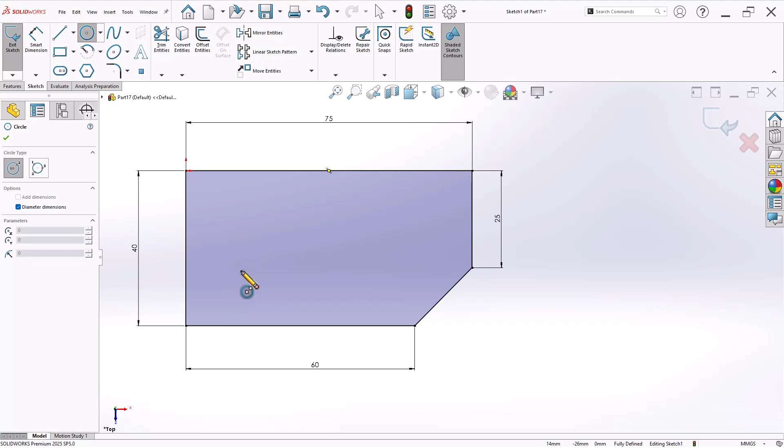So let's trim. Now let's add circles. This is 15. Make sure both circles are aligned.

Now the distance between them is given as 35. Now let's add one more fully defined dimension: from here to here is 55. Let's extrude by 5.

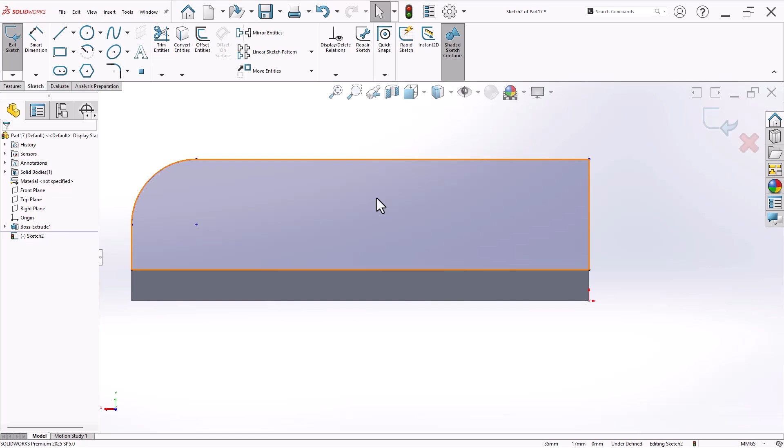Now let's start from here and sketch the back part. Let's make this vertical, convert into entities. Let's make this tangent as well. And let's add radius 25.

And the overall height from the bottom is 35. So let's extrude, reverse the direction, and the thickness is again 5 mm.

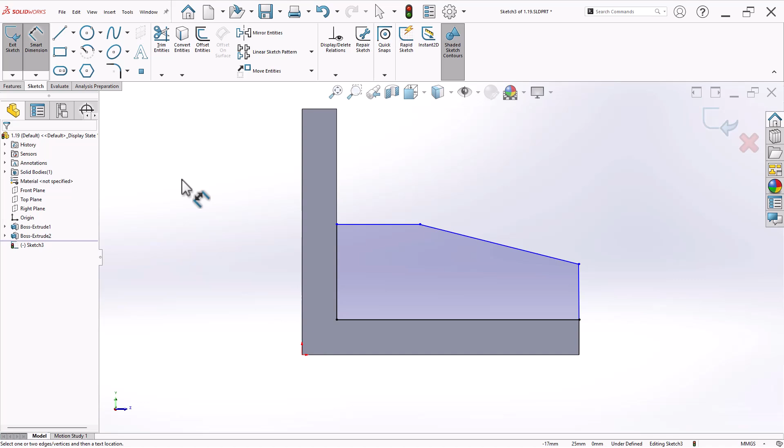Let's complete the sketch on this side. So from here, let's complete by converting into entities. Now let's add the dimensions.

So from here to here it is 21. And from the bottom to this point it is 12. Overall height is 20.

Now let's make this vertical. Now let's extrude, reverse the direction. Thickness is as given, again 5 mm.

Now let's expand and measure the volume. So it is 26719, which is perfectly matching with the given answer.

Now let's try practice problem 1.20. We'll begin by drawing this circle. Then we'll add the two rectangles which are tangent to this center hole, same for the bottom side, but at a 90 degree angle.

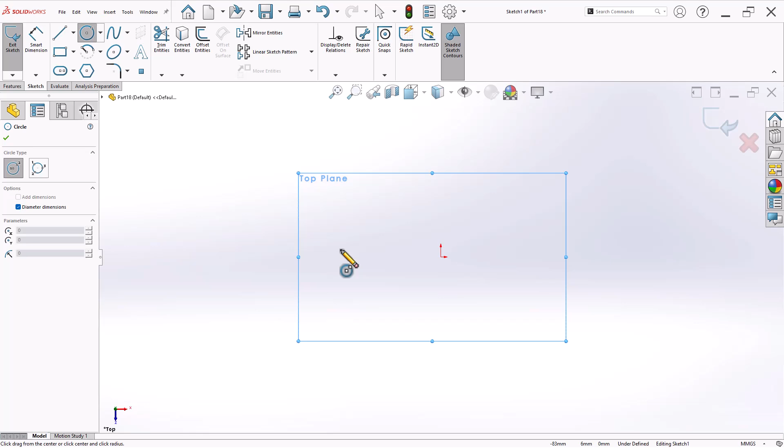So start a new part. Let's go on top and create a circle, diameter is 110. Again, one more circle having diameter 32.

Now let's add a rectangle over here. Before that, let's add this center line. Okay, let's make them tangent.

Let's contact these two, and the dimension is typically 12. So let's mirror this rectangle.

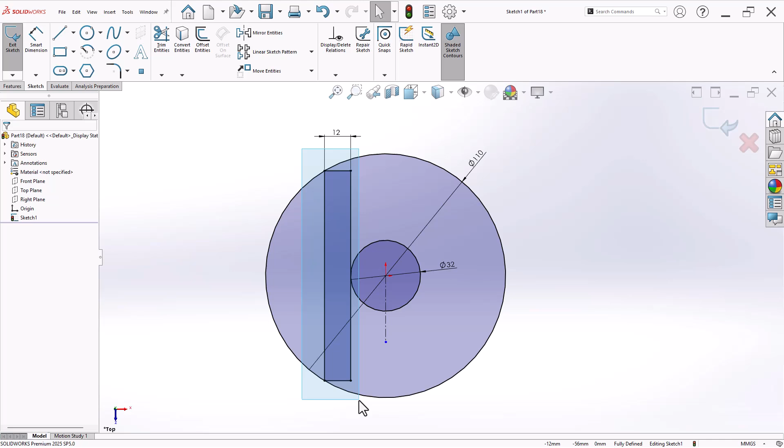So let's extrude. I will use the complete circle and this region first. The overall thickness is 10. I will expand the sketch.

Again, I will extrude, but this time I will use these two rectangles whose thickness is 20. Extrusion thickness is 20, but we need to offset from this surface, because the sketch is drawn at the bottom side. So overall height is 20.

Let's do the same thing. Let's draw a sketch from the bottom side, but this time we'll draw the rectangle horizontal.

So here it is 12. So this must be tangent to this hole. And this must be coincident with the periphery. Now let's mirror.

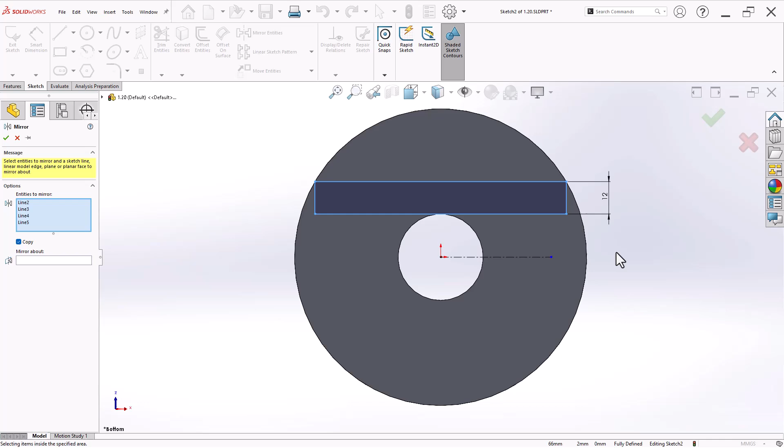Now let's extrude by the given distance 20.

Expand the sensor to see the answer. Here the answer is 177,881, and in the solution file it is 812, so which is correct.